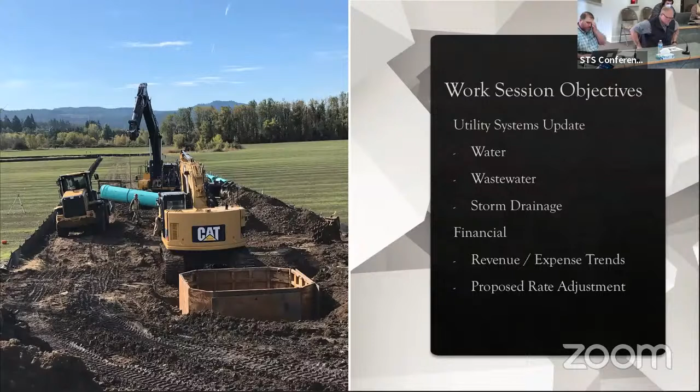So from today, the objectives basically is just to go through all three systems that we've got, water, wastewater, storm drainage, give you the revenue expense trends that we're seeing right now, and then any proposed rate adjustments that we want to talk about moving forward for next year.

So feel free to ask me any questions, keep it informal for us. I mean, ask us questions as we're going through. We'll keep it pretty short, and looking for feedback from you guys on anything that you want to know more about. So we'll start off with the water system.

So with the completion of the new water treatment plant in 2018, the staff has been mainly focused on water line replacement, looking at big water lines to replace, small water lines to replace. Also been looking at the demolition of the existing water treatment plant. We're under contract right now to have plans drawn up for that. Sounds weird, but we're having demolition plans put together.

Anytime you bid something, you've got to bid apples to apples. So we're doing that, going through the environmental process with that. Hope to have the demolition process going later this summer. It's all dependent on state agencies and whatnot. So we're working through that process, along with looking at a lot of different water lines to replace in the system.

Give you an idea of where we're at this year for production. We've got about 588 million gallons of water produced so far this fiscal year as of March. Interesting tidbit, that's about 27 million gallons more for that time frame than it was the year past. So we're seeing an additional revenue stream there as well as picking that up. So the amount of water billed is also on an upswing as well.

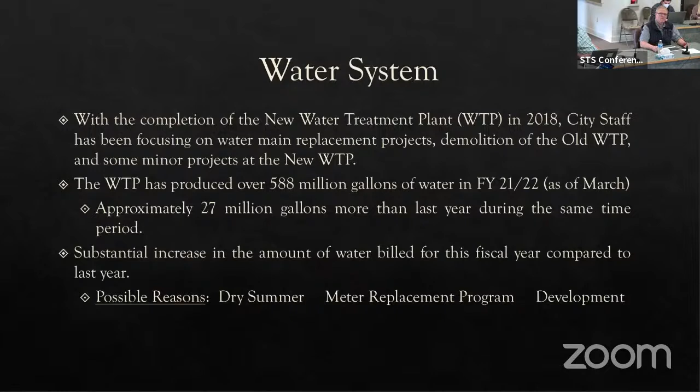And we're attributing that to kind of the dry summer that we had last year. And then we're also doing a lot of meter replacements. As meters age, they tend to read low. So we're actually billing the correct amount. And then we've had a lot of new development come onto our system as well. So there was definitely an increase that we've noticed, and it's also reflected in the revenue stream for this year from what we had originally anticipated.

Again, back to water mains, there's a lot of large diameter and small diameter water mains that need to be replaced for various reasons, whether they leak. We've got areas where our pressure is lower than it should be, and not anything drastic, but in order to provide good fire service, we need some upgrades through that.

We've also been setting aside money for our membrane replacement at the water treatment plant, so that's not a big hit when that happens. In fact, I think this year was the last year. I think we're in pretty good shape for setting aside money for that. And that's likely a 10-year replacement from the time the plant was built, so here within the next 5 to 6 years, we'll probably start looking at replacement of some of those membranes.

Kind of some fun facts, I guess, if you want to call it that way. We got about 82 miles of distribution main in our system. If you take the average of what we've done over the last 5 years, some years it's more, but it's approximately 2,000 to 2,500 lineal feet of main replacement on a yearly average. If you took all that together, that equates to about a 170-year life cycle for our water mains, whereas a typical ductile iron pipe, which is what we use, has a 100-year life cycle. So you can see we're well below the recommended replacement cycle.

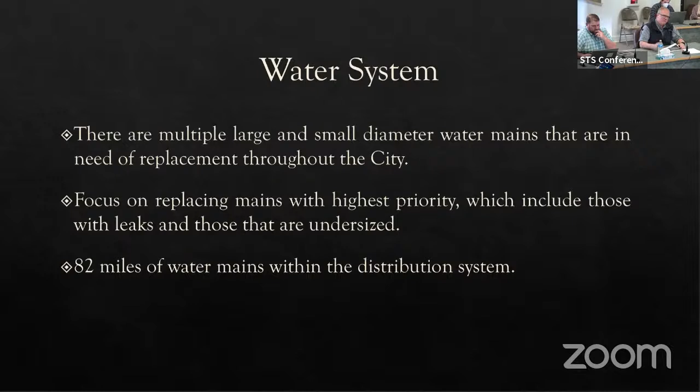I don't think we're advocating that we've got to hit this 100-year life cycle. We tend to replace more on what's needed rather than, hey, this pipe's old. So just something to keep in mind, that we do have aging infrastructure, and we need to be in a place where we can continue to maintain it as things fail. And just because it says it's got a 100-year life cycle, maybe it's 110, who knows? That's just the recommended for ductile iron.

Some of the upcoming projects: we've got the Walker Road water line replacement as part of the West Side Interceptor. That replaces water line from Stoltz Hill to 6th Street. Right now, there's a 12-inch AC line in there that's about 45 years old. You ask, why do we replace that?

The construction that we're doing down there, the complete road reconstruction, it doesn't make sense to leave an asbestos cement water line in the ground in order to have it leak only when we get the road finished and have to dig it up and replace it then. So we're replacing that. That's been part of the project.

Stoltz Hill Road water line extension. We're extending water line down Stoltz Hill Road from Airport Road. That's in conjunction with the Airport Road traffic signal. There's still a lot of things up in the air with that in terms of development. Waiting on a few things, waiting on right of way. So once we have all that in place, we'll pull the trigger on that traffic signal that's out there, and water line extension will go along with that, sidewalks. It's a fairly substantial project.

Hey, Ron, go ahead. Excuse me. On the traffic signal at Stoltz Hill Road, is that still on? It's just part of the project? Yeah, so give you a little update. So we're waiting, the property on the southeast corner is in county, and right now Linn County is going through the condemnation process for 175 square feet of right of way. So they're going through that process.

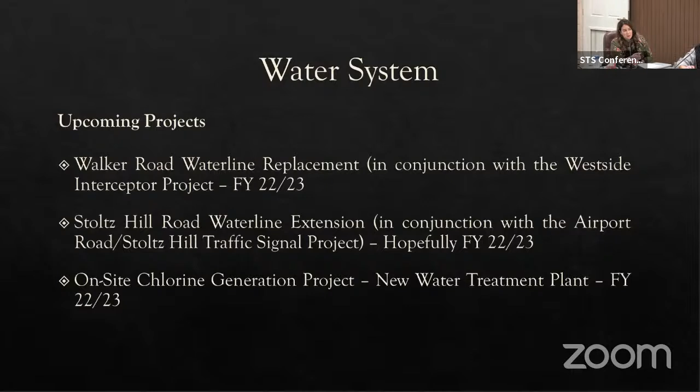7th Street water line replacement. So this has been on the books for, I don't know, 3 years now. And we do have the money set aside in the water fund to replace the water line. But as soon as we put equipment on that piece of 7th Street from basically Oak to F Street, we're going to destroy the street. There's no way around it. So we're trying to put together a whole project to do a complete road reconstruction, utilities through there.

And we're really close. I think the one place where we're lacking a little bit is probably storm drainage, but you'll see as we come to the budget committee this year that we've put money in reserves for the water line, roadway, and I believe sewer line as well. So we're getting closer. My goal is to have that done, or at least started by next spring, summer, somewhere in there. It's just going to depend on how funding plays out, but we're close.

Highway 20 water line replacement. So that's a water line replacement. Right now, there's a 6-inch water line from basically Russell Drive and Highway 20 all the way over to, oh gosh, it used to be the mattress store, basically that little motel right in there. It ties into a 12-inch. We're intending to replace that. That's scheduled to be replaced, which we have the money set aside for the water line. But that's scheduled to be replaced with the Dewey Street intersection realignment.

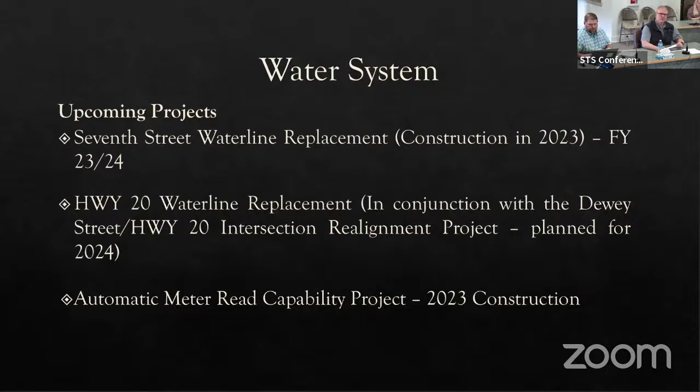The other thing we're doing is the automatic meter reading capability project. Basically, that'll put towers up and we'll be able to automatically read meters from City Hall, and there would be very little meter reading that goes on anymore. So it'll be automated. I believe there's money set aside next year in the reserve fund. I don't think we had quite enough to pull that project off too. How much of the city will be covered by that? Well, when we're all done, the whole city. Really? When the project's complete, that's the goal. Okay. And then lockoffs can happen remotely from City Hall, from the finance office.

Is it Wi-Fi or? No, the radio read pucks that are in the meters, and then they'll shoot, basically, to our towers that we'll have in 2 different locations within the city. Okay, yeah. Nice. Cool. So that's kind of it.

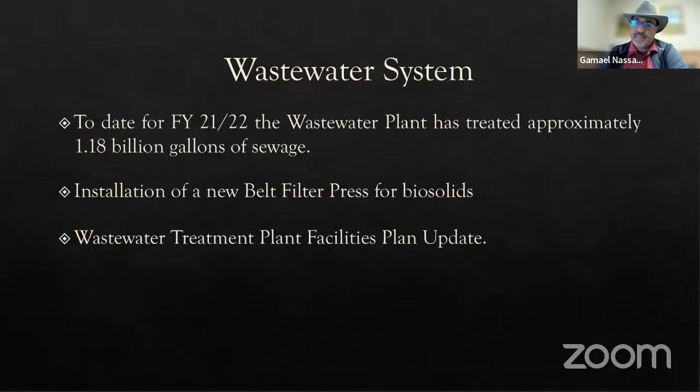I have a question as well. Oh, go ahead. Once that's all said and done, will we be down an FTE? Will anybody lose their job because it won't be necessary? No, we've got other stuff for them to do. Yeah. Government. Chasing leaks in our water mains, probably. Any other questions with the water fund? That's kind of where we're at this year, what's going on.

Okay. Moving on to the wastewater fund. So to date, again, fiscal year 21-22, we've treated about 1.18 billion gallons of sewage, in the time frame from July 1 to basically the end of March. One of the other things that's happened out at the wastewater plant is we have a new belt filter press that was purchased and installed out there to help us with biosolids. That's one of the things that's going on at the wastewater plant.

We're continuing to see a substantial increase in the amount of failed sewers and leaking sewers. In fact, about 45 minutes before this meeting, we were out looking at a failed sewer at the intersection of Williams and Wheeler, which is on our main trunk line. We've got some more investigation to do there, but it's not looking the best. So we've got some work to do with that.

To give you an idea, Scott Wilkerson, who's our crew chief for the collection system, every time I see him coming, I want to hide because he's always got something new. I got to give him kudos for getting out there in our system and really digging things up. But it's like, okay, let's get what we've got first. You kind of have to take the most emergent pieces first, and if there's things that we can hold off on and catch the next time, that's kind of how we're running the sewer replacement right now.

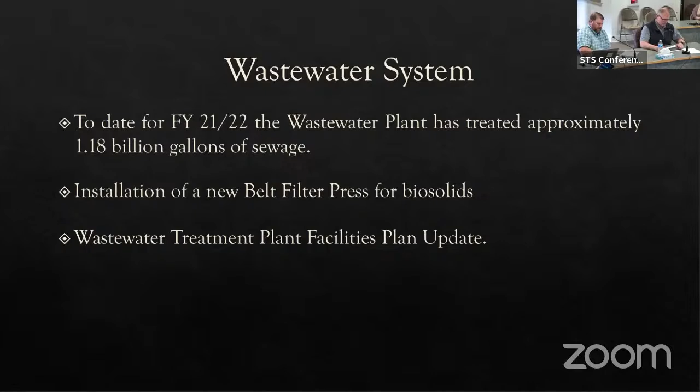Our maintenance crews are constantly out cleaning. I think last year they cleaned about 29,000 linear feet of pipe and TV'd almost 21,000 linear feet of pipe. So that's how we're finding all this stuff. They're very active in the system. They're out there every day with either the Vactor or the TV van. And then usually they end up in my office or Jason's office telling us all the good things that we need to fix and what we need to do from there.

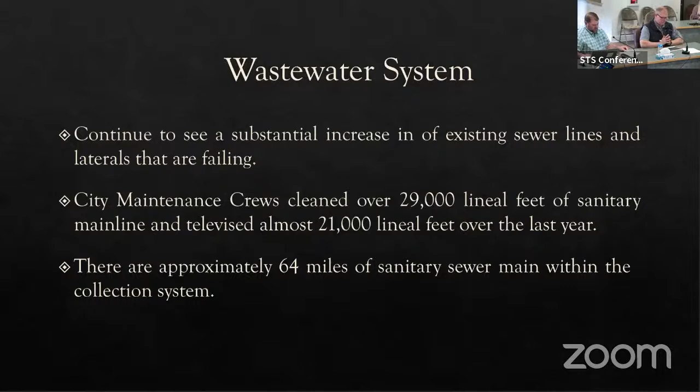So again, go back to sewer. We've got about 64 miles of sanitary sewer pipe in our system. That doesn't account for manholes or laterals. That's just sanitary sewer main. If you take the average on what we replace, and of course, this is all dependent on depth because the deeper you are, the more expensive it is. But on average, we replace 1,500 to 2,000 lineal feet of pipe per year. Average life cycle on what we use is PVC. We've got a lot of clay, we've got a lot of concrete in the system, is 50 to 80 years. We're well beyond the recommended life cycle on our sewer system.

Again, we continue to push to get as much done as we can, but honestly, in the climate that we're in right now, it's extremely difficult. Things have cost so much that it's really tough to get to all of it. And that's where we go into the reactive mode and we fix things that pose life, safety, health risk and people that are plugged up. That's what we kind of focus our efforts on rather than looking at the system. We still look at the system as a whole, but it's mostly reactive at this point.

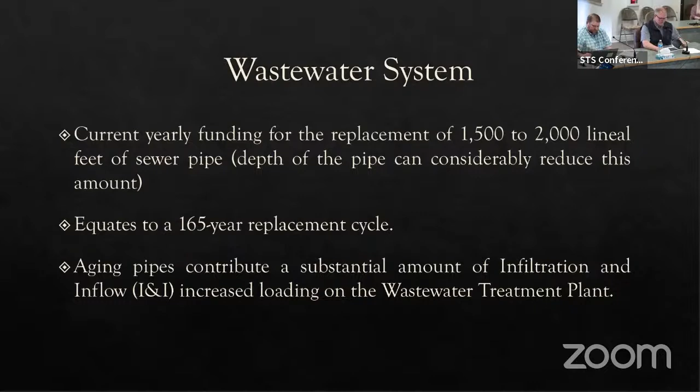So current and upcoming projects, right now, obviously the West Side Interceptor is in full swing. Kind of give you an update on that. We've installed pipe from Oak and Airway intersection all the way over to Stoltz Hill and Oak Creek. So if you can picture that alignment, it goes all the way down Airway, all the way out to Stoltz Hill and then over to Oak Creek. So we've got a good chunk of pipe in. Right now, we're working on getting the manholes finished up, and then we're going to work on getting the roadways, Airway, and also Stoltz Hill put back together here in the next month and a half. So the restoration will be done.

What percent about is that done? So in terms of dollars, this month's pay estimate put us at about 33%. Right. So we've still got all of Vaughn Lane to do, 5th Street, Crowfoot, come back up South Main a little bit, and then Walker Road. So there's still a substantial portion. I think the good part, we've got all the really, really deep pipe in. Now we're sitting at average about 17. We were in some places 21, and that's a big operation to get that. So we're making good headway.

They're on schedule. In fact, in some cases, they're ahead of schedule. They've had 2 crews out there working in different locations. My guess is with the amount of work that's out there right now, we'll probably only see 1 crew from here on out once they get a few things done, just because there's so much work in the industry and they're having a hard time finding people to actually go to work for them. So, which is fine. They'll still maintain that schedule.

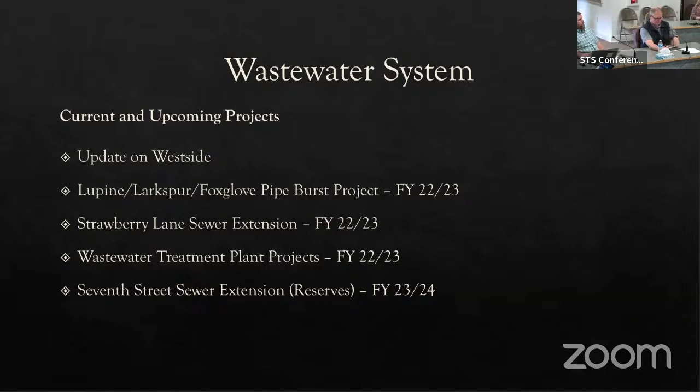Okay. How is the project going of cleaning up the mess that we had to clean up? Just kind of an update on that part of it. The plant's running really well. We're still finding some unique things that we're dealing with as they come. We're hoping to have a little bit of calm next fiscal year. I think everybody would like to see me quit spending money out there.

So we think we're to a point where the plant's going to continue to meet permit and function, and we've got a good handle on replacement cycles and maintenance and fixed things that were absolutely failed. I think we're in a really good spot right now.

Good. Thank you. Yeah, you're welcome.

Okay, moving on into the storm drainage system. We've got approximately 60 miles of storm pipe in our collection system. That doesn't account for our catch basin runs, which I don't even want to think about how many of those are. It'd be huge. On average, every 2 to 3 years, we probably replace 1,500 lineal feet of pipe, and normally that's with some other project, like a road reconstruction project. It's not just going out and primarily targeting storm drainage.

So that equates to, I didn't even put it down. I don't even know what the life cycle is on that. It's the same life cycle for materials as you would have with our sewer, 50 to 80 years, but a very substantial life cycle. Our new drainage master plan, which I'm hoping we get to bring to you guys in June, is pretty much done.

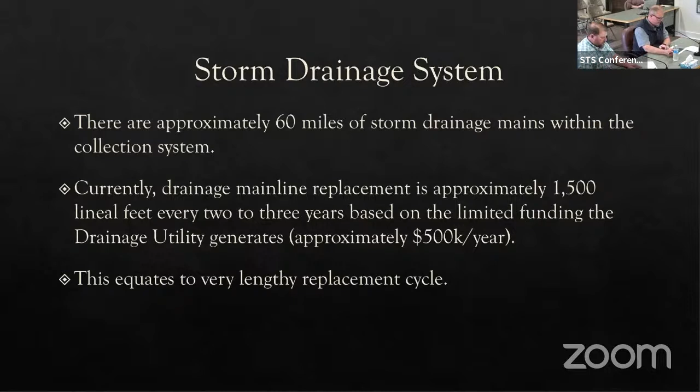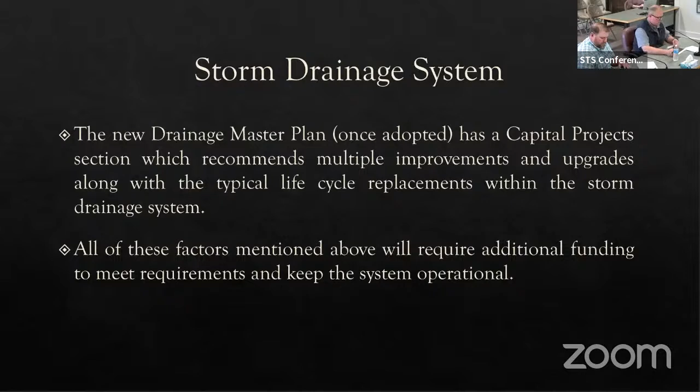It's got a capital project section, and there's going to be multiple improvements and upgrades recommended in the system. And all these factors are going to require additional funding to meet requirements and keep up with what's going on in the system. One of the things that we're finding, with our TMDL, which is our total maximum daily load, or any time we pull a wetland permit, we are required to go through DEQ water quality.

DEQ water quality, for instance, on the west side Interceptor, just on Walker Road, we are charged with not only treating the new impervious surface, but the entire roadway surface. Well, what does that look like? It could be anywhere from drainage swales to water quality catch basins, which are multimedia catch basins that have to be replaced every 3 to 5 years. We've opted to use the water quality catch basins and manholes this time.

I think from operations and Jason's perspective, the swales become garbage collectors. If you look at Airport Road and the infiltration basins, not to say that there's not a place for them, but they require more maintenance for probably more periods of time during the year. Whereas if we have water quality catch basins, it's all right, once every 3 to 5 years, we'll go in and replace the media and okay, we're done for 3 to 5 years rather than an ongoing maintenance.

So those are the things that come out of that with this water quality, and it's only going to get more stringent as we continue on down the path and grow. Ask Albany, they just turned the MS4. I mean, they're really taxed with a lot to deal with stormwater and what it requires them to do.

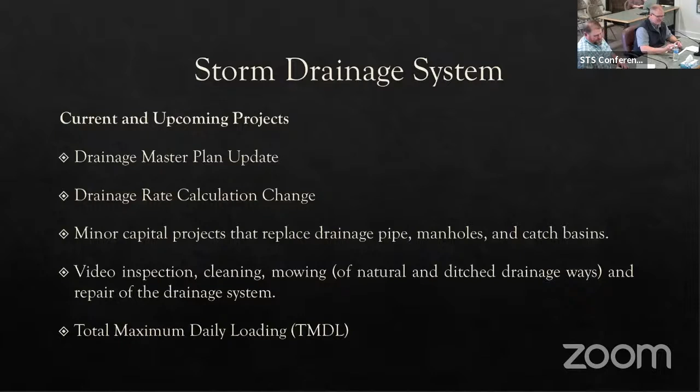They're keeping the system running well, and again, they're constantly in either mine or Jason's office asking, hey, what are we going to do with this? What are we going to do with that? And pretty soon you run out of ink to write it all down, and you just go, we're going to deal with stuff that we got to deal with. So they're doing a good job there. Any questions on the storm drainage utility?

Okay. Moving on to the financial. So revenue expense trends for this year. Revenue's on track for all 3 utilities. It's at or above what we projected last fiscal year for the budget. So we're moving there. If you remember back, water, we're looking at probably close to 10% more than we projected. And that's based on the additional units billed for this year. So we'll see if that trend holds.

Right now, it looks like it's just based on the additional meters that we have coming online. And we've had some really dry summers, so people used a lot of water during that time frame. So that's what we're attributing it to. I don't have any other factual data other than that. We'll see what the trends are and kind of play with them from there and see what happens. And again, expenses for all 3 utilities are on track to come in slightly at or below budget. So we'll be on target for those. And unless it's the wastewater plant, it's going to be close.

So one of the things Nancy and I and Jason and Matt have talked about is when we do rate adjustments, what that looks like and how we've done them in the past. What we've done in the past is we've taken each utility and said, hey, we're going to do X% in water, X% in storm drainage, and maybe we don't do a percent in the wastewater fund, or vice versa. And we've done it just as a straight percentage for folks on their billing.

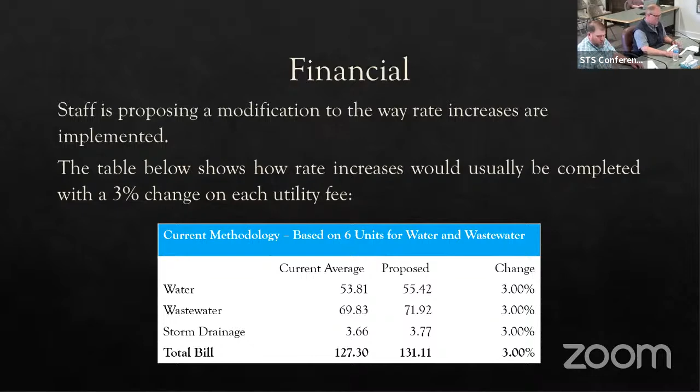We've also looked back at the last 5 years. In the past, we've used 7 units as our average, and looking at our residential customers, it's more like 5.9 units. In the chart down below, I just used 6 for round figures. So that first page is how we've done our inflationary increases in the past. And if you go to the next page, this is what the proposal is moving forward, if council should agree.

That way, like our drainage utility, where we don't generate enough revenue to really do much in terms of capital projects, we can start building that without raising everything at this amount. It's basically just a hit of 3% to their bottom line bill.

We've got different things that would trigger that. Our TMDL might say you need additional funds in your storm drainage. Or our NPDES permit, when we get that renewed, might say your wastewater rates are low because you've got X, Y, and Z projects to do. Those are just examples, not things we necessarily see coming at this point. The chart below gives you an idea of what that looks like.

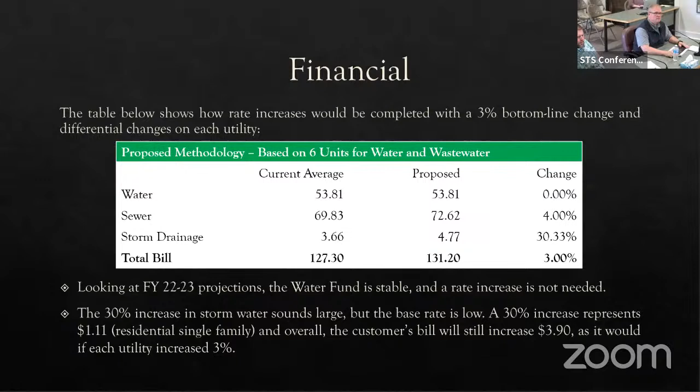And then the storm rate, it's a 30% increase, but it equates to basically $1.11 on residents' bills. That starts to build that fund so we can actually do some replacements and get some things done in the system. So, questions, comments? Opposed, yes, maybe?

I was going to say, basically it's going to go up the same amount, you're just targeting it to where you really need it. Yes. Which makes sense. I like the total amount idea. That makes sense. And then you guys can move that money in whatever direction it needs to be.

Yeah, and we would still want this body involved. We're not going to say we want 3% and then do something else. We want you to be a part of that so you know what we're intending to do with it. Even though the dollar amount's the same, framing it as 3% to your overall bill rather than 3% to this utility is going to come across a little bit better.

People are still going to be irritated, understandably so, and we don't want to raise rates any more than we need to. I think we run pretty lean staff as it is. The reality is the construction cost index last year for this area was about 21, 22%, and it's only going higher. Our ductile iron pipe has doubled in the year. So we've got to keep up with it, otherwise we won't have anything.

I just want to comment, staff is working really hard to keep that rate increase at 3%. We recognize everyone is paying more, and that includes us paying more for everything right now. We're trying to recognize that for customers, but we feel we really need to build that base in stormwater. You heard Ron talk about the need to replace the 7th Street line.

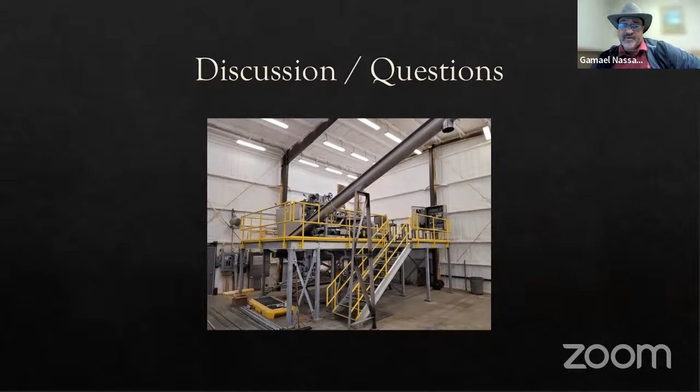Okay. Well, I agree as well. Go ahead. I was about to say the same thing, Michelle. If someone were to approach me and say, well, it's going up 30%, I'd say, well, yeah, that's really only $1.11. I'd rather look at it that way and the bottom line of 3% than have a conversation about a 30% increase. So I agree with you. Thank you.

Okay, well, that's the way we've built the budget. That'll be presented next week. Resolutions for it, we'll probably bring back in the June meeting and have you guys approve those resolutions prior to approving the budget. So with that, hold on. Jason, would you like to talk about the picture that's up there? Oh, yes, yeah, there you go.

That piece of equipment you see is our new belt filter press. That sits in the same building that you may have heard of, the Cannibal system, at the wastewater plant. So this piece of equipment will take our solids, activated sludge, and it'll press it into a cake, and it'll come out that auger into the back of a 12-yard dump truck to go to landfill.

So we're excited to get this commissioned. If anybody wants to see it, now's a good time because it's not operating yet. It won't be for a few more weeks. But it's really a nice piece of equipment, and they've done a really good job of getting it installed. So excited about that. And just so the public knows, previous to the cake producing equipment, how were we disposing of the waste that we produce?

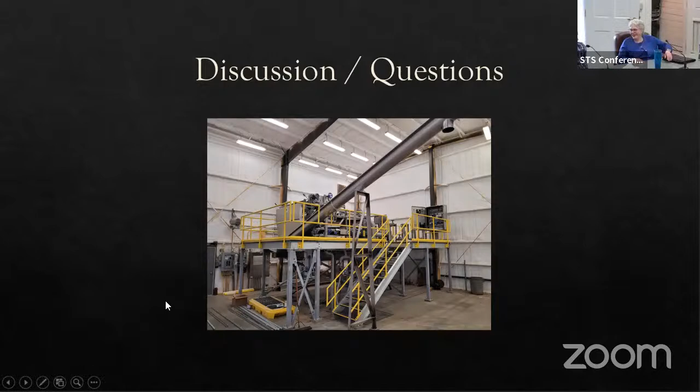I was hopeful. Hopeful, but just